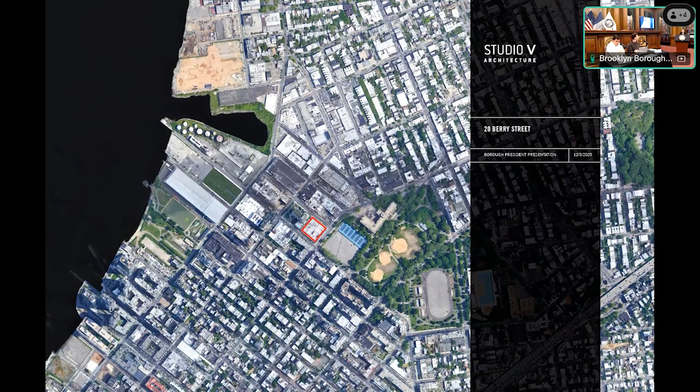So with that, let me ask Diane if she'll take everybody through our slide presentation. Hi, good evening. Can you hear me? Are you able to hear me? Is that better? Yes. Okay, great. All right. Good evening. My name is Diane Liebs. I'm from Goldman Harris, and I'll be taking you through our proposed project at 20 Berry.

So our proposed project is a 10-story mixed-use building. It would be comprised of a mix of uses, mainly industrial and commercial, and the commercial component will consist of retail uses, restaurant uses, and office uses to create a building that's approximately 192,000 square feet, which is a 4.8 FAR building. It'll have 80 parking spaces, 2 loading berths, and there'll be approximately 10,000 square feet of publicly accessible open space on the outside of the building.

So in order to facilitate this development, we're seeking a few land use actions, the first of which is a zoning map amendment from M1-1 to M1-2, the purpose of which is to enable us to be able to apply for the IBIA special permit. The second is a zoning text amendment to expand the industrial business incentive areas, the IBIA areas, to include our site. And then the third is the IBIA special permit itself, which would allow for modifications to height, setback, floor area, the plaza, parking, and loading.

So regarding the first land use action, the zoning map amendment, as you can see on the left, our existing zoning district is M1-1, and our intention is to rezone to M1-2. So that would be adjusting the location of the existing M1-2 zoning district boundary to the west of the site and having our building be the same zoning district as the majority of the neighborhood to the west.

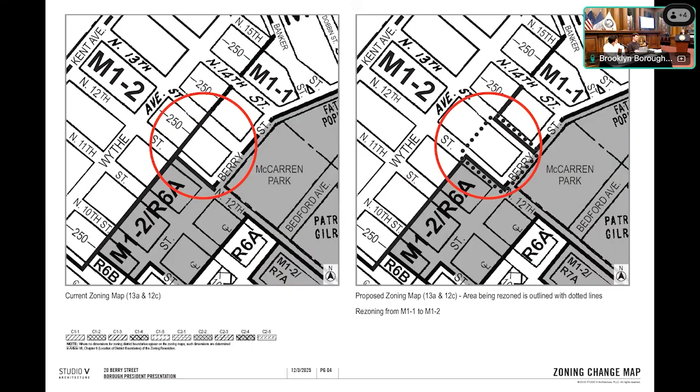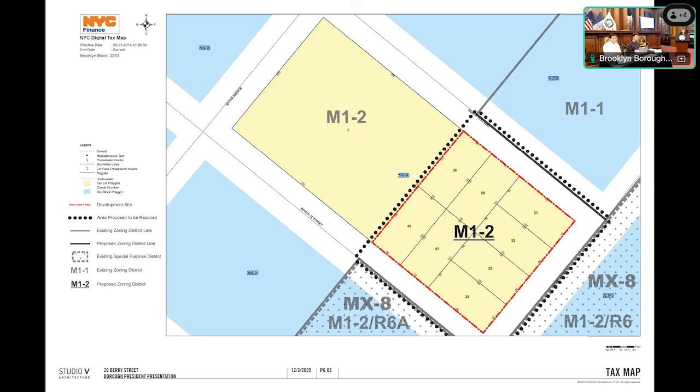Here's the tax map showing the current conditions. So currently there are 8 tax lots on the site, all of which are owned by the applicant, Hadi Hajar, and each of which consist of a single-story manufacturing building. So there's 8 single-story manufacturing buildings on the site.

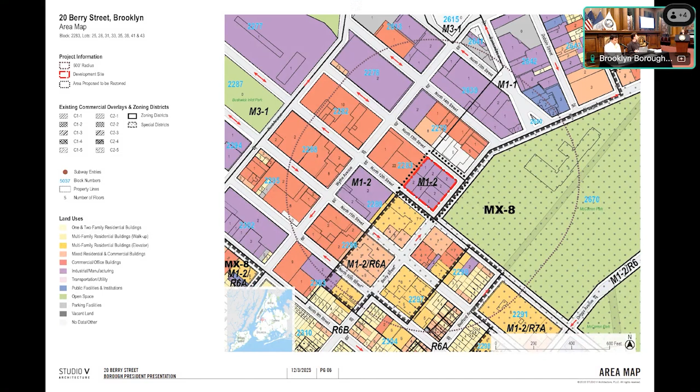In terms of neighborhood context, to the south, it's predominantly residential in yellow. To the east, we're directly across from McCarren Park. And then to the north and west, there are industrial uses shown in purple and commercial uses shown in red. So our proposed building, which is industrial and commercial, is in line with the character of the neighborhood that's there currently.

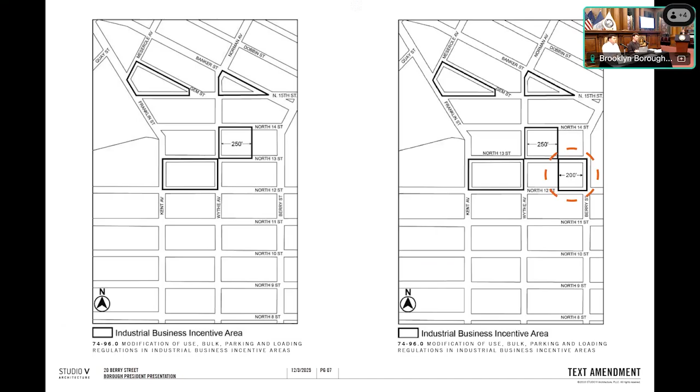In terms of the zoning resolution text amendment, we're proposing to change from what's shown on the left to what's shown on the right. On the left is the current industrial business incentive areas. We're interested in having our site mapped as an IBIA as well, so that we can use the IBIA special permit.

In terms of community benefits, we believe our project will provide a lot of benefits to the community, predominantly supporting industry, since as part of the special permit we'd be required to maintain a specified amount of manufacturing space, ensuring manufacturing uses remain on site. In addition, we'll be providing community serving retail, open space, a building that's an appropriate scale for the neighborhood, resiliency, and fueling local jobs, since this project will generate 600 new jobs according to the environmental assessment statement.

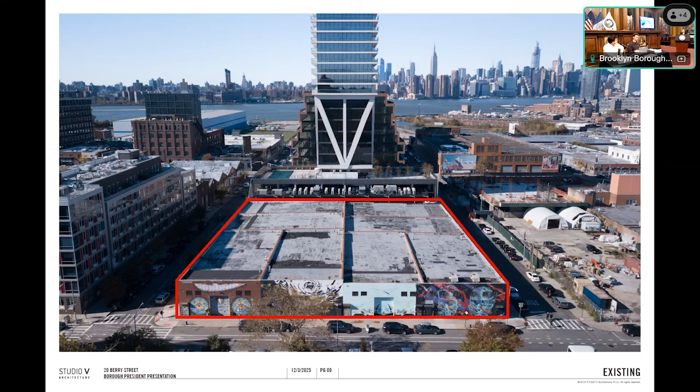In terms of existing conditions, the site consists of 8 single-story industrial buildings, shown in red here. Behind us you can see the William Vale Hotel in terms of location, so we're right next to that.

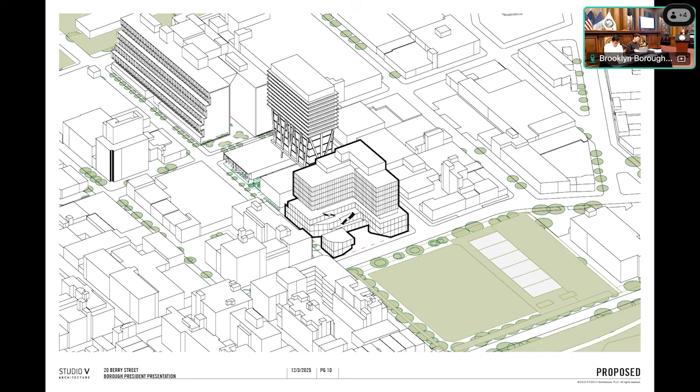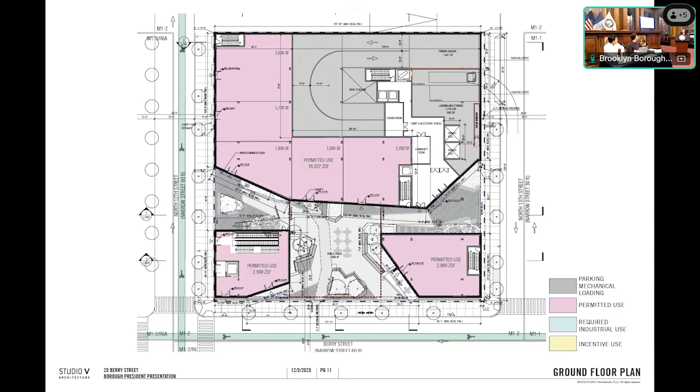Here's another floor plan, again showing various uses proposed in the building, as well as tenant spaces of various sizes that can be broken up based on the tenant's needs.

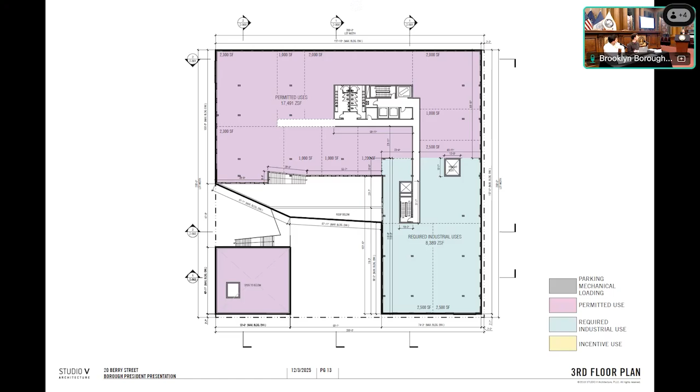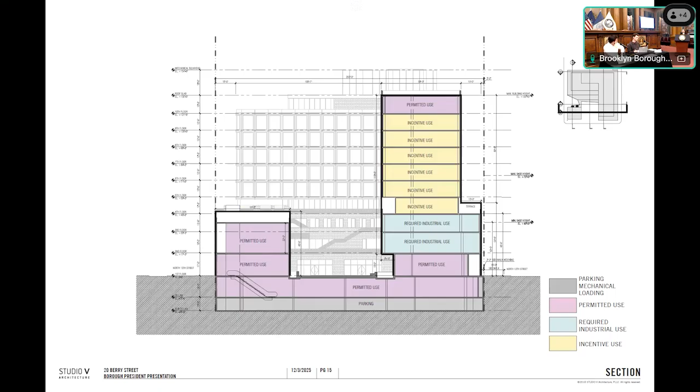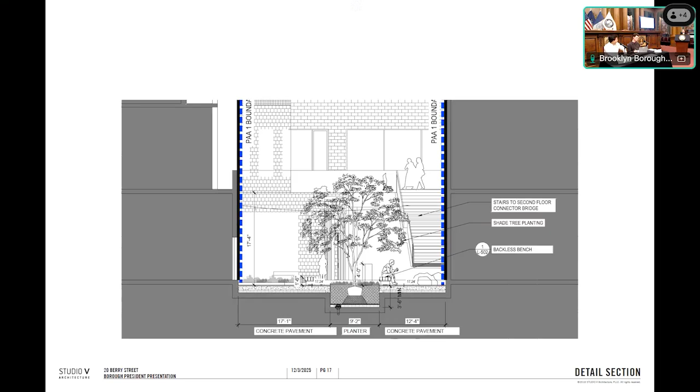The next few slides show the plaza that's proposed and the various amenities within it. Here you can see benches and trees, and another cut-through showing various amenities, trees, benches, movable seating, planters, and things like that.

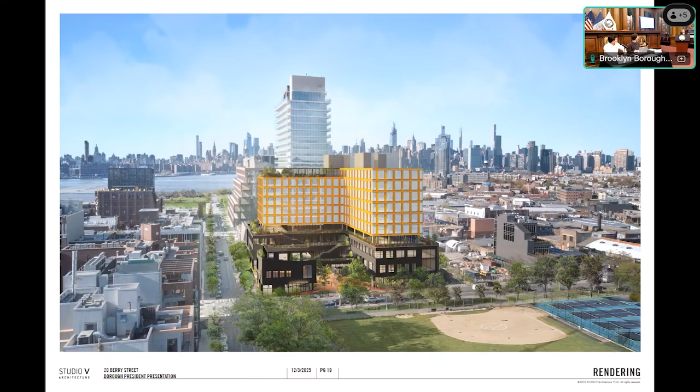This is what the building is proposed to look like. The base of the building is this darker brick, meant to be reminiscent of the industrial character of the neighborhood, and as you get higher it sets back, with the upper portion of the building finished in terracotta.

And here you can see the various open spaces that are proposed. The architect and landscape architect were sure to make it a nice green space that has lots of trees and is inviting to the residents of the neighborhood as well as people who are entering or leaving McCarran Park.

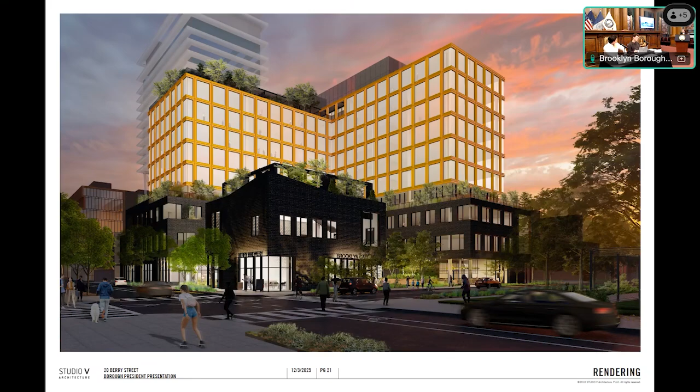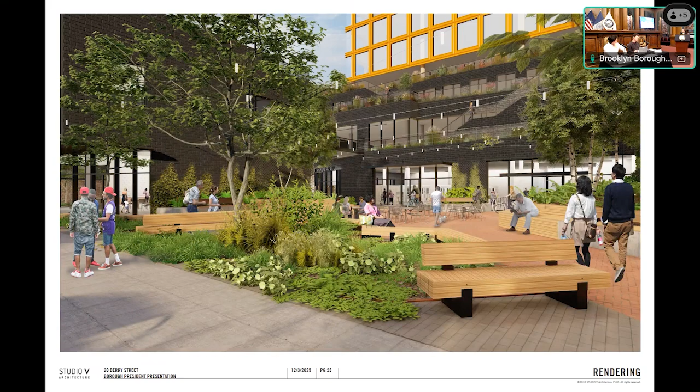Here's another view highlighting the retail pavilion on the corner. Again, another vantage point showing both the plaza space and the proximity to McCarren Park. And here you can see the lighting, the benches, the landscaping, and other various amenities that are proposed.

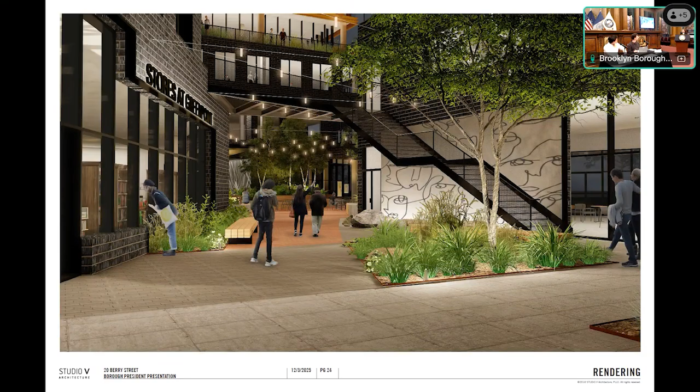And here you can see an example of a mural. The applicant, Hadi, on his buildings that are there now currently has murals that were created by local artists, and so he wants to maintain that for his project here, incorporating that component into his new development as well.

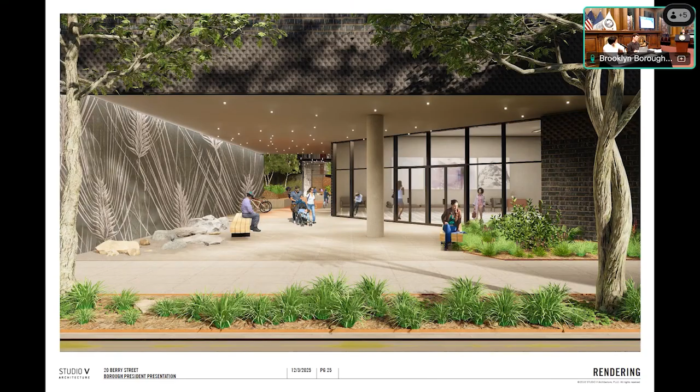This is the main entrance to the building, and in the back you can see some bicycle parking spaces that are covered. We also have bicycle parking spaces on Berry Street and more inside the building as well. And this is our last slide, again showing the plaza, and we'd be happy to take any questions you have.

Great, thank you for the presentation. Just a few questions. Did the applicant consider any other zoning districts for this application,

including any of the new so-called growth districts created by City of Yes for economic opportunity? So in order to be eligible for the IBIA special permit, there are two zoning districts as currently listed in the zoning resolution that would be eligible, one of which is M1-2 and the other is M1-4.

And so we chose the lower density district that was currently available. Great, thanks. What are the anticipated parking needs for the industrial uses on site, and would the applicant consider waiving additional commercial parking spaces from the proposed project?

So as proposed for this project, there would be, I believe it's 700 plus spaces that would be required based on the zoning resolution, and so we're already seeking a waiver to reduce those parking requirements down to 80. Even just the industrial spaces alone, based on a parking requirement of 1 to 300 square feet, would require 100 plus spaces, so we're providing even fewer than that. We tried to create a nice balance of making sure to provide some parking for the tenants, but not providing too much parking so that it would be something that's not suitable for such a transit-oriented site.

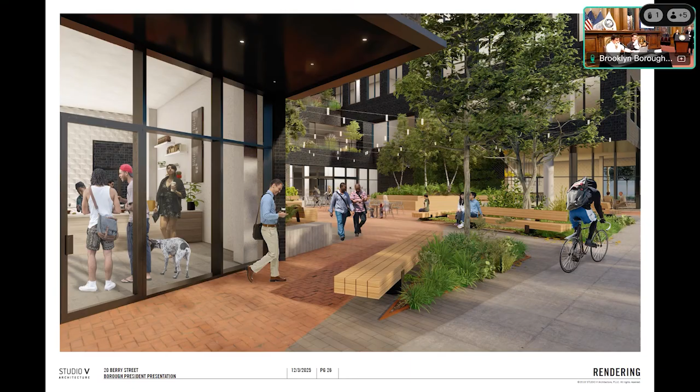Do you have any other questions? Okay, thank you, this panel is now excused. I just note that Mr. Hajar has just entered the room. Noted, thank you, thank you.

Great, we will now call for testimony on this application, first from members of the public in person tonight. Okay, so we have no one signed up to give testimony in person. Is there anyone else present who would like to give testimony?

Seeing none, we will move to online. We will encourage anyone who would like to provide testimony to please use the raise hand function and keep it raised until called on.

North Brooklyn Open Streets, you can speak. Am I unmuted? Can you hear me? Anyone? Can we hear me? Great, you can hear me. Yes? Yes, we can hear you. Okay.

Sorry, my name is Solveig Entwistle. I am a volunteer with North Brooklyn Open Streets. We are the DOT community partner for Berry Open Street, which runs from Broadway to North 12th. For over 5 years, we've been advocating to make it easier to walk and bike on Berry Street.

While we appreciate the developers dedicating public open space, 80 underground parking spaces is excessive and unnecessary for the neighborhood, particularly as 20 Berry is close to transit: the B32, B62, Nassau Ave G, Bedford Ave L. The site also has incredible access to bike lanes on Kent and on the Berry Bike Boulevard.